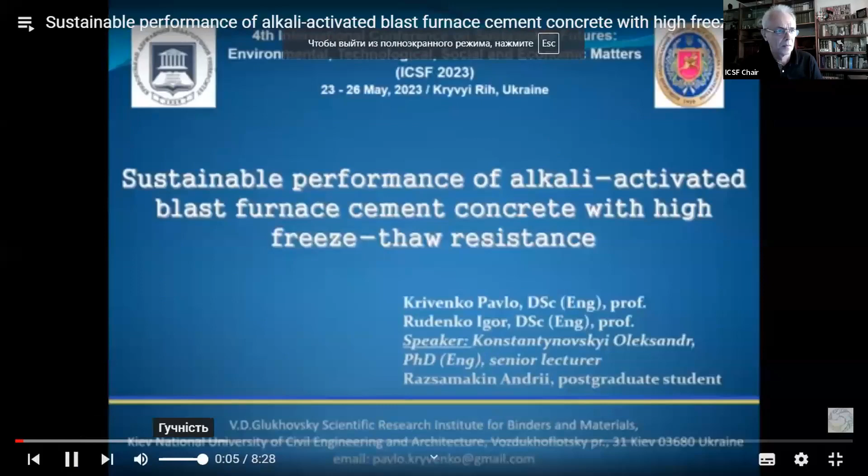Some technical problems. Sergei Alexeyevich, dear Sergei Ivanovich, could you please press the security button and enable screen sharing for any participants? I don't see a security button. It's your power for this, thank you. Possibly the first to enter and get administrative rights is Alexander Polivoda. Alexander, could you please check the security settings of our session? Alexander Polivoda is absent. Would you like to do this? I'm present, colleagues. Oh, okay, please. Nice to meet you, good morning. Good morning. Please start the presentation, Investigation of the Influence and others. First presentation, okay. Thank you. No, not this presentation, Investigation of the Influence of the Lime Content, first presentation. I even don't hear sound. Fast. Yes, this. Sound, please. We don't hear sound, Alexander Anatolyevich.

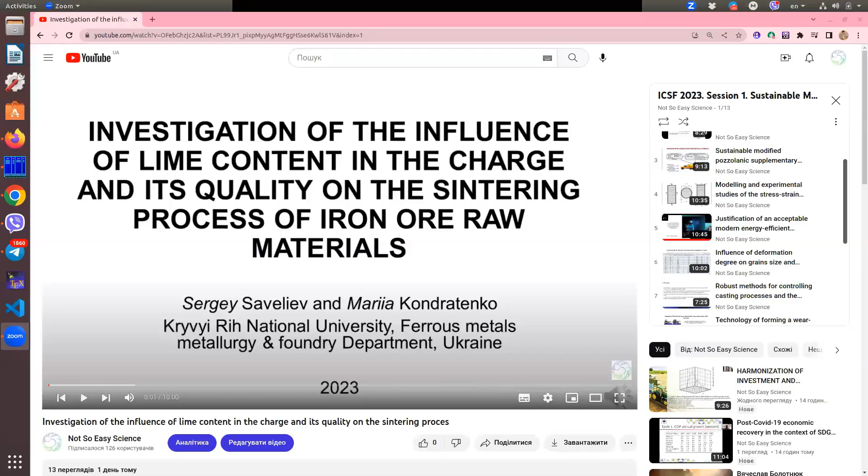Dear colleagues, your attention is invited to a research paper on the topic: Investigation of the Influence of Lime Content in the Charge and its Quality on the Sintering Process of Iron Ore Raw Materials. The work was carried out by scientific and pedagogical workers of the Department of Ferrous Metallurgy and Foundry Production of Kryvyi Rih National University.

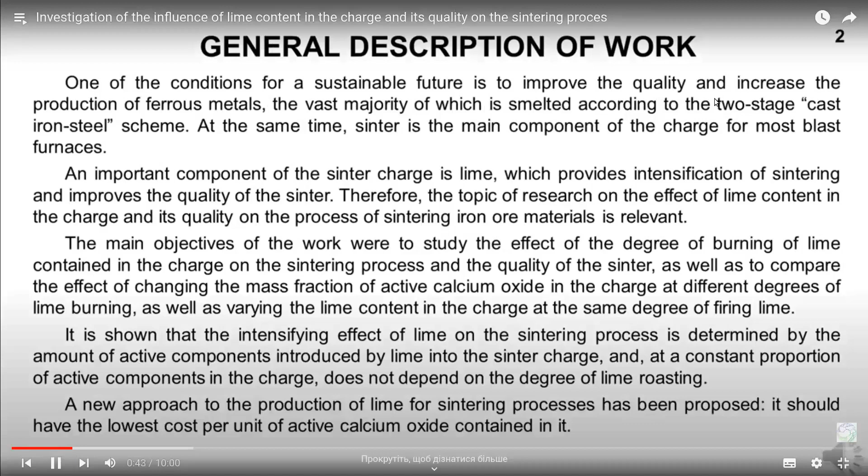General description of work: the main objectives were to study the effect of the degree of burning of lime contained in the charge on the sintering process and the quality of the sinter, as well as to compare the effect of changing the mass fraction of active calcium oxide in the charge on sintering performance, first with different degrees of lime roasting and the same lime content in the charge, and second with different lime content in the charge and the same degree of lime roasting. It is shown that the intensifying effect of lime on the sintering process is determined by the amount of active components introduced by lime into the sinter charge, and, at a constant proportion of active components in the charge, does not depend on the degree of lime roasting.

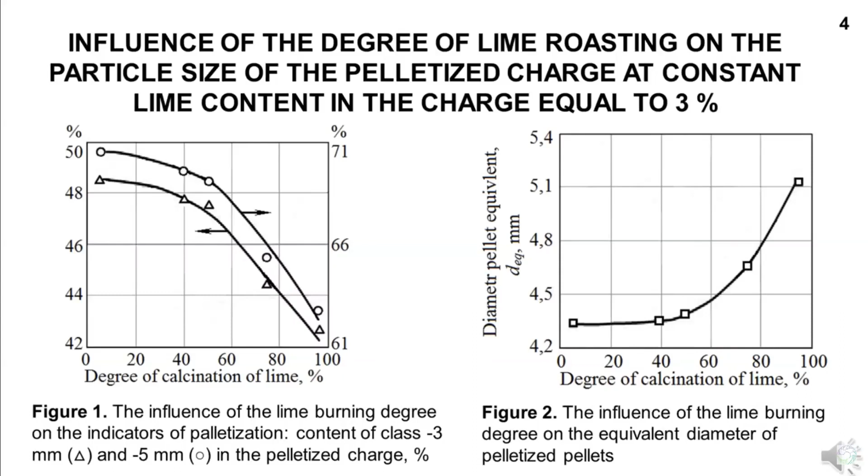It can be seen from the figure that with an increase in the degree of roasting of lime, the equivalent diameter of the pelletized charge granules increases.

Influence of the degree of roasting of lime, given in the charge, on the strength of the sinter. The dependence of test results of sinter in the drum on the lime burning degree is extreme, Figure 5, which is obviously caused by a change with the increase in the degree of calcination of lime in the ratio between the development of processes that have the opposite effect on the strength of the sinter.

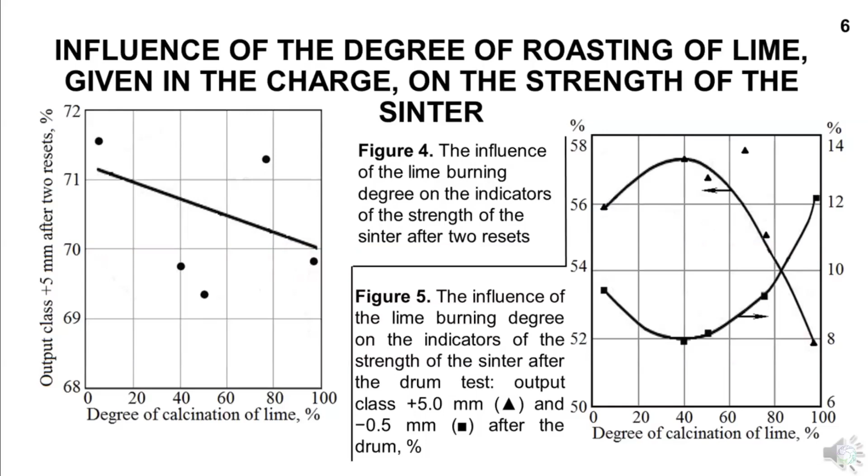The yield of the +5 mm class after double dumping of the sinter pie from a height of 2 meters, while increasing the lime burning degree, tends to decrease. Figure 4.

Influence of the content of active calcium oxide in lime on the intensity of the sintering process and the strength of the sinter at a constant lime content in the sinter charge, 3%.

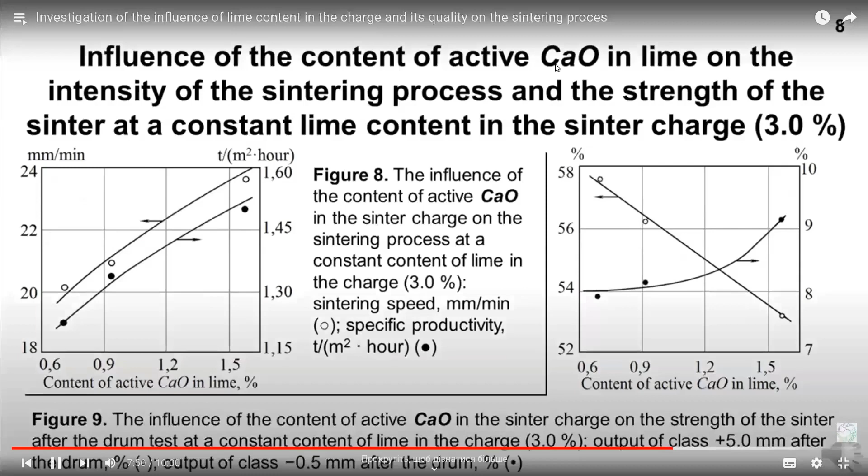With an increase in the active calcium oxide concentration in the sinter charge in the range of 0.71 to 1.58%, the sintering rate and specific productivity continuously increase, see Figure 8, as well as the drum test indicators decrease, see Figure 9.

The mechanism of the lime intensifying effect is associated with its positive impact on the process of charge pelletization, reduction of the proportion of small fractions of 5 to 0 and 3 to 0 millimeters in the pelletized charge, which is accompanied by an increase in the vertical sintering rate and specific productivity of the sinter plant.

The efficiency of the limestone replacement by lime at sintering is defined by the quantity of active calcium oxide introduced by lime in a sinter charge, and in this sense practically does not depend on the lime burning degree or its concentration in charge. A similar pattern occurs when using lime as a binder in the production of pellets.

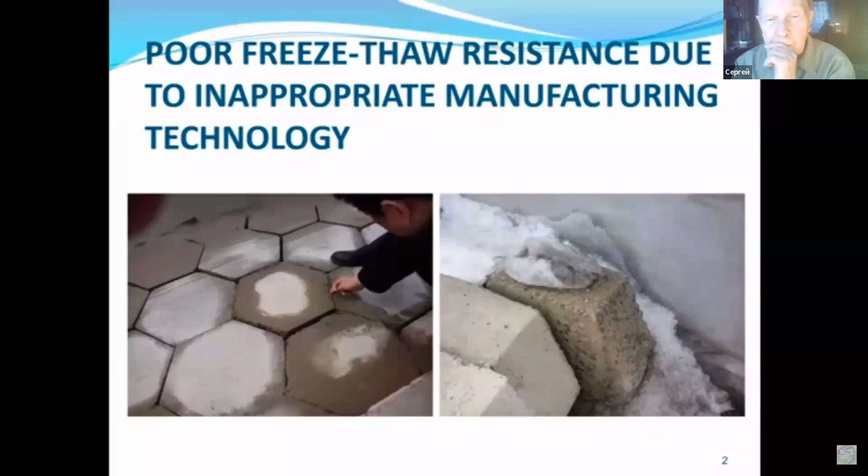To ensure the durability of constructions is one more current world tendency of sustainable development of mankind. The most important properties of concrete used for evaluation of durability depend on destination and environment. Resistance of concrete to freeze-thaw cycles is one of the criteria. Cements obtained due to alkali activation of blast furnace cements are the most prospective ones to ensure advanced service life of concrete structures of special purpose. The peculiarities of porous structure cause advanced freeze-thaw resistance of alkali activated blast furnace cement concrete.

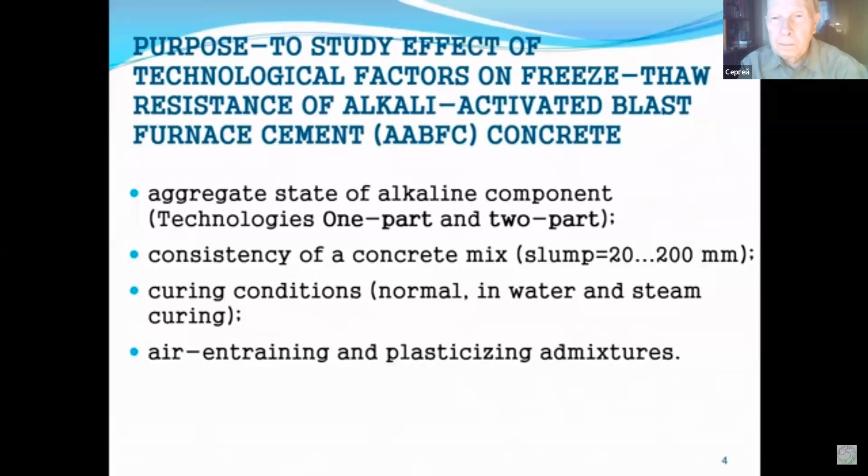Porous structure of such concrete in its turn is caused by technological factors such as consistency of fresh concrete, aggregate state of alkaline component, curing condition, and application of chemical admixtures. The modern requirements to consistency of fresh concretes are governed by practice. Production of alkali activated blast furnace cements, namely under all-in-one technology, causes the expediency of alkaline component exactly in dry form. Thus, the aim of this research was to investigate the effects of technological factors on porous structure of alkali activated blast furnace cement concrete of special purpose to provide its high freeze-thaw resistance as criterion of sustainable performance.

The main constituents of the blast furnace cement type CEM III/C were represented by ground granulated blast furnace slag and Portland cement type CEM I 42.5R. The blast furnace cement was composed of 95% of slag and 5% of Portland cement by mass. The alkaline component was introduced in a concrete mixer in dry form or in liquid form in such a way that its content in the concrete would be equivalent. A river silica sand and a granite gravel were used as aggregates. Alkali activated blast furnace cement concrete was modified by complex admixtures, presented by sodium lignosulfonate and a waterproofing agent based on ethyl hydrosiloxane polymer.

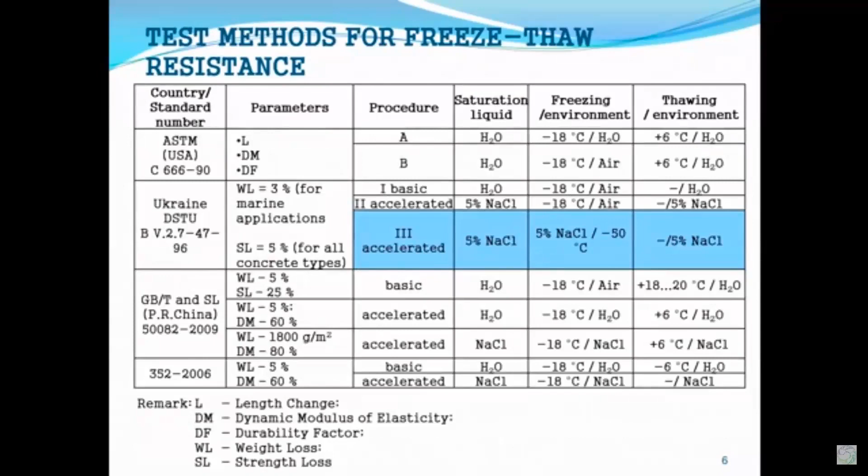Freeze-thaw resistance of alkali activated blast furnace cement concrete was studied according to the third accelerated test method prescribed by the national standard of Ukraine. According to this method, the concrete cubes were saturated with a 5% solution of sodium chloride at temperature 18 degrees, and after that were subjected to freezing at temperature minus 50 degrees. Thawing was done in a 5% solution of sodium chloride. A class of concrete in freeze-thaw resistance was designated as a number of alternate freezing and thawing cycles at which mean compressive strength decreased by no more than 5%. The freeze-thaw resistance was assessed by the correspondence between permissible number of cycles by the mentioned method and by the first basic method prescribed in the standard.

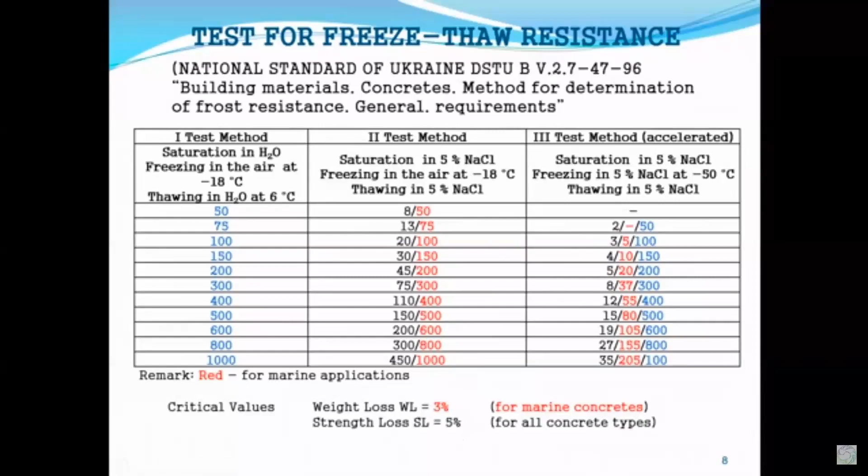Alkali activated blast furnace cement concrete was prepared by one-part technology, when alkaline component was introduced in dry form, and two-part technology, when it was introduced in liquid form. The specimens hardened in water, under normal conditions and under steam curing. It was revealed that consistency of fresh concrete is an important factor of porous structure. Increasing of consistency from class S1 up to class S4, with alkaline component in dry as well as in liquid form, ensured increasing volume of open pores and decreasing volume of conditionally closed pores. Less volume of conditionally closed pores determines formation of less dense and more permeable structure, which causes deterioration of physical and mechanical properties, including freeze-thaw resistance decrease.

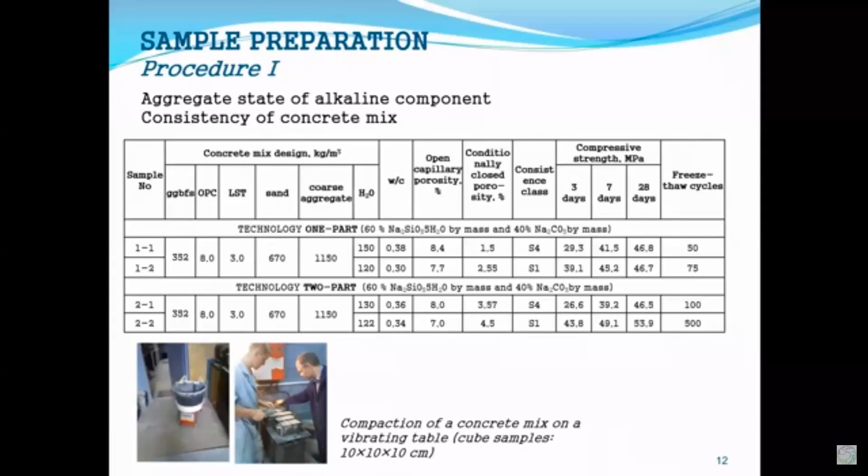Application of alkaline component in dry form, in contrast to liquid form, ensured high volume of open capillary pores at consistency classes S1 and S4 accordingly; lack in filling intensity of porous space by hydrosilicate gel caused this phenomenon. Decrease in volume of conditionally closed pores occurred. Specified changes in porous structure ensured a decreasing tendency in freeze-thaw resistance. Normal curing conditions were more advisable compared with curing in water or under steam curing in view of formation of effective porous structure.

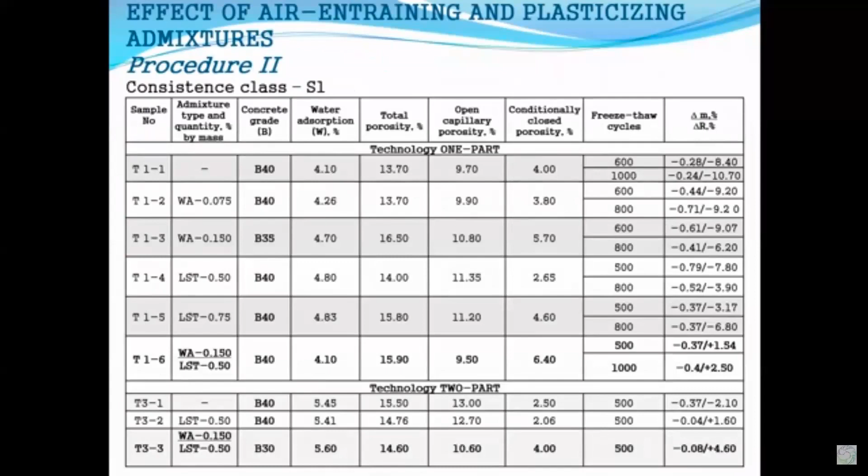Porous structure of alkali activated blast furnace cement concrete at consistency of class S4 after hardening during 28 days under normal conditions was characterized by decreased volume of open capillary pores as well as increased volume of conditionally closed pores compared with analogs under water or steam curing. These changes contributed to a more dense structure, providing advanced freeze-thaw resistance. Application of air entraining and plasticizing admixtures ensured higher volume of conditionally closed pores and lesser volume of open capillary pores, which increases freeze-thaw resistance when alkaline component was applied in dry as well as in liquid form.

The ways to ensure high freeze-thaw resistance of concrete of special purpose were pointed out: limitation of consistency of fresh concrete, application of the alkaline component in liquid form in contrast to dry form, application of air-entraining and plasticizing admixtures, and hardening under appropriate temperature-humidity conditions ensure closed porosity between 3 and 6% and advanced freeze-thaw resistance.

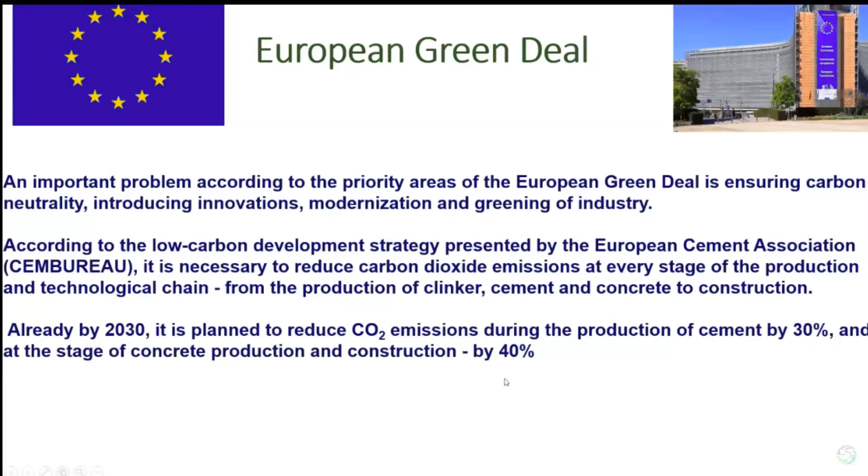The investigation task of the article is to create eco-efficient blends containing supplementary materials, to design criteria of hydraulic surface activity of supplementary cementitious materials, and to show technological, technical, economical, and ecological benefits from using supplementary cementitious materials in low carbon concrete.

The problem of energy efficiency and reducing CO2 emission in building production is largely determined by a set of technological and ecological ways to replace a part of Portland cement clinker with supplementary cementitious materials. Due to the rational selection of cementitious materials in the production of low-carbon cement, technical, ecological, and economic effects are achieved. Pozzolanic supplementary materials such as natural zeolite, fly ash, and microsilica were used.

Adding supplementary cementitious material of pozzolanic action directly to the concrete mix instead of part of the Portland cement contributes to reducing the cost of concrete, increasing the strength in the subsequent period of hardening and increasing durability. In this case, replacing each kilogram of clinker in concrete with additional cementitious materials allows reducing CO2 emission by 0.61 kilogram.

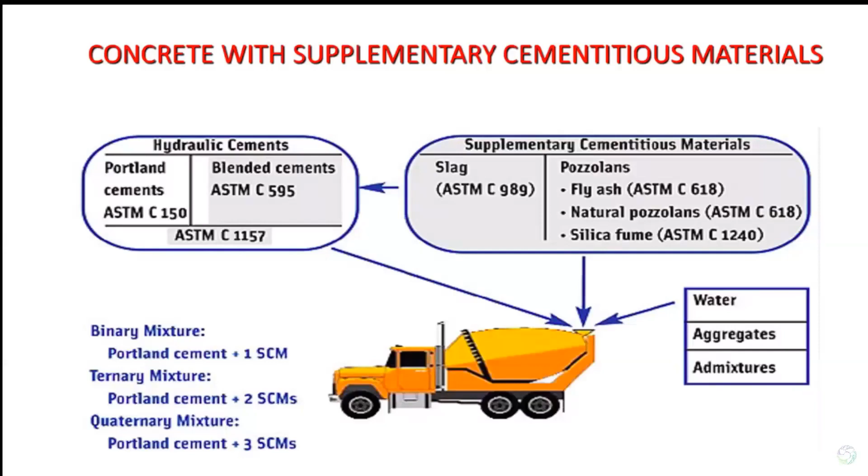Fly ash is an important pozzolanic material; when mixed with cement it significantly affects the strength development of cementitious composites. Fly ash increases durability and strength of concrete at later age, but at the same time reduces the early strength of concrete. It also reduces the amount of water-reducing admixture required to obtain the same consistency.

Silica fume significantly increases the strength and durability of concrete, but it has a high water demand, so it requires the use of an increased amount of water-reducing admixture. A significant resource of the European region of natural pozzolans is zeolite tuffs.

This makes it possible to solve the problem of regional application of pozzolanic supplementary cementitious material. Highly siliceous zeolite tuff, the main mineral of which is clinoptilolite, has unique characteristics such as high specific surface area and ability to exchange cations.

Natural zeolite with 70% content provided from Sokyrnytsky quarry was used. Superfine zeolite was obtained by grinding natural zeolite to specific surface area greater than 11,000 square centimeters per gram. Interaction of superpozzolana with products of hydration of Portland clinker leads to decrease of its porosity, which helps to increase the strength, corrosion resistance, and determine its durability.

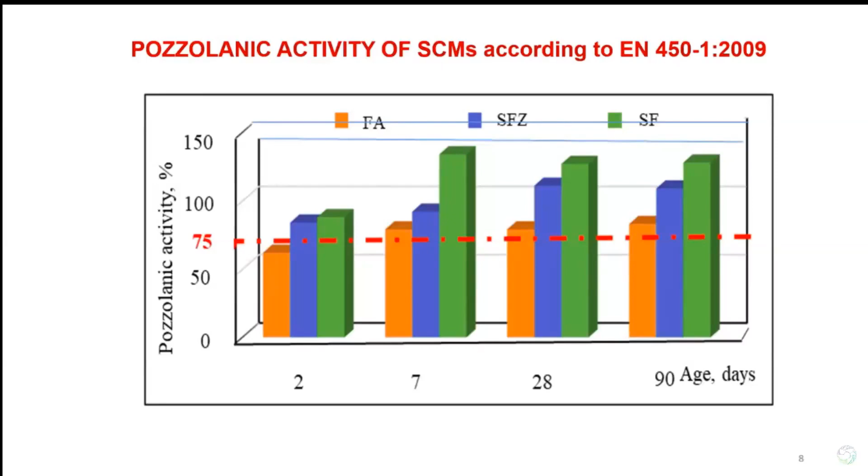Highly dispersed supplementary cementitious materials such as superfine zeolite and microsilica are characterized by increased water demand and have low bleeding. Fly ash is of lower dispersion compared to the other pozzolanic materials. Fly ash is characterized by particles of the correct spherical shape, which provide a plasticizing effect due to the roller-bearing effect. Therefore, its water demand is reduced 27%, but it's characterized by significant bleeding.

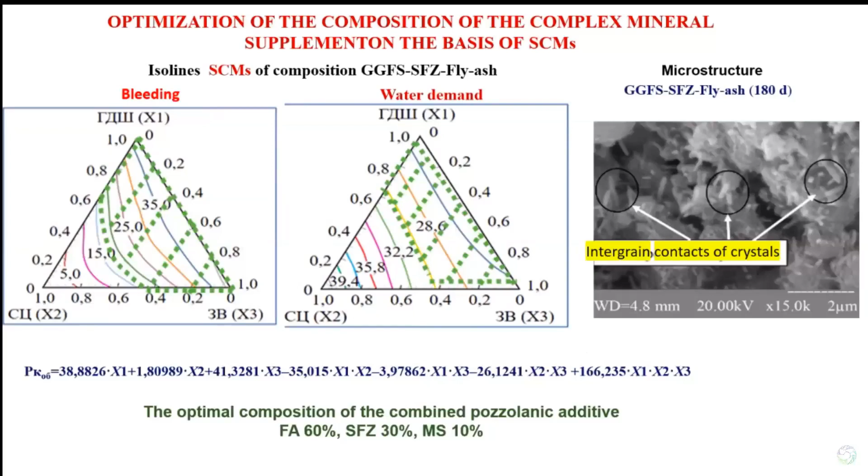The optimal composition of complex pozzolanic material blends is determined by strength activity index. The combined effect of components on the pozzolanic activity after 28 and 90 days was investigated using the Scheffé simplex-lattice plan method. For the component mixture, each point of the triangular diagram corresponds to one ratio. The regression equation is presented as follows. The optimal composition of the combined pozzolanic additive is fly ash 60%, superfine zeolite 30%, and microsilica 10%.

The water reducing effect for the lignosulfonate modifier is 14%, and when modified with polycarboxylate, water reducing effect is 22%. At the same time, the blend modified with polycarboxylate is characterized by higher compressive strength: more than 20 megapascals after 2 days and more than 50 megapascals after 28 days.

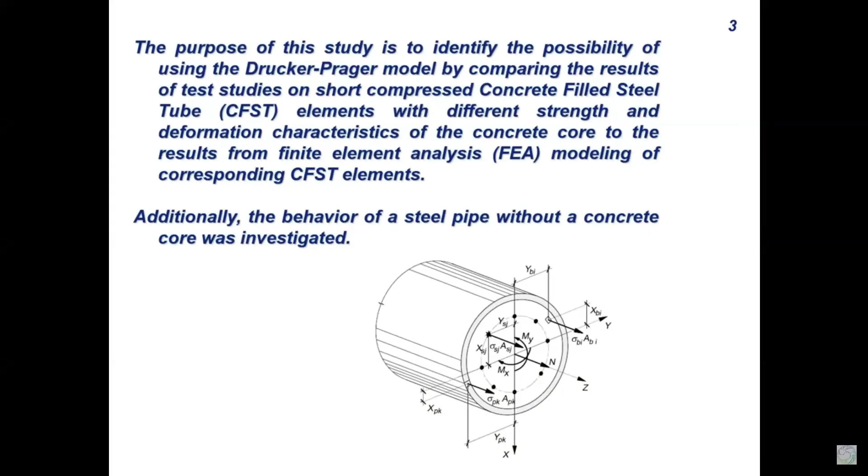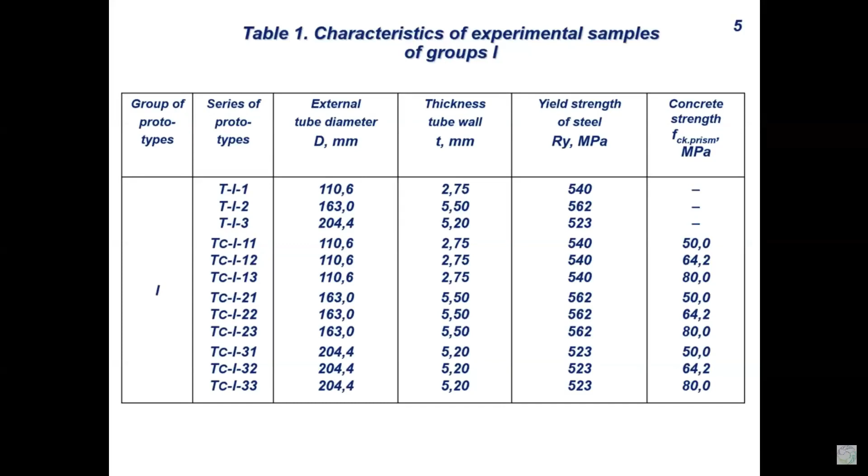The above-mentioned material is based on the experimental studies conducted by the authors earlier. According to the results of these experiments, it was possible to establish the nature of the destruction of the tube-confined concrete with strengthened cores of different structural forms, and the distribution of deformations at all stages of loading. The next slide shows the characteristics of the same samples. In particular, the diameters of pipes and the thickness of their walls, the yield strength of steel, the strength of concrete.

Modeling method adopted in the work. The modeling of the operation of CFST elements was carried out considering the nonlinear function of the components. The calculation was carried out considering large deformations. By the task, the CFST elements have a symmetrical tubular section and a central load case.

To reduce the size of the model and reduce computational costs, the analysis was carried out considering the modeling of cyclic symmetry. In this case, the behavior of one symmetrical sector, 1/4 of the tubular component, was calculated, and the results obtained were used to build the response behavior of the full component, as a post-processing step.

The simulation was carried out using the non-commercial software ANSYS Student by the finite element method in the Workbench environment. The nonlinear calculation of CFST elements was carried out considering the Drucker-Prager concrete work model, and taking into account the multilinear isotropic hardening of steel. The joint work of the steel pipe and the concrete core in the model was provided by frictional contact. Following studies, the friction coefficient was taken equal to 0.5 in the simulation.

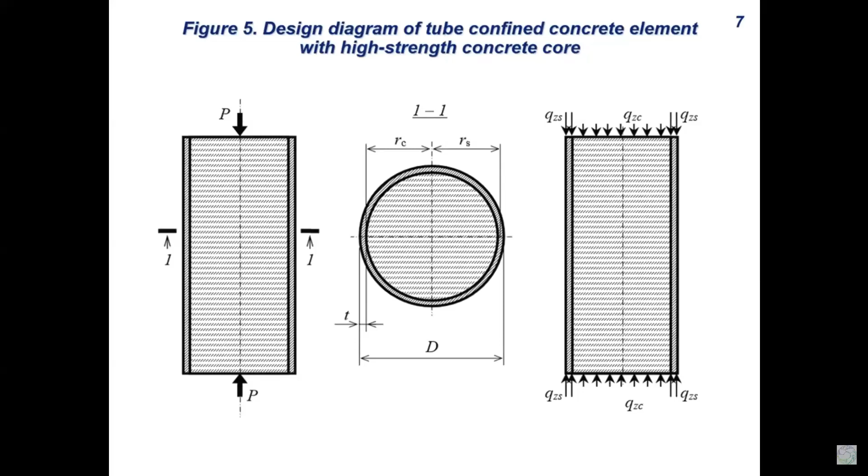Features of concrete modeling. The Drucker-Prager model was used to simulate the behavior of concrete, which describes the nonlinear behavior of concrete and is based on the theory of plastic flows. The calculation of the parameters of the Drucker-Prager model was carried out according to the methods proposed in the famous works. The parameters given in Table 2 were used in the calculations of the behavior of concrete.

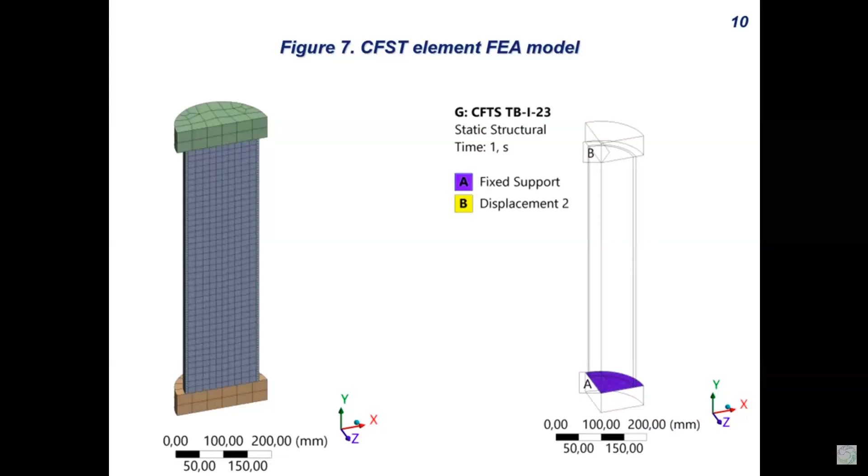CFST FEA model. When preparing the mathematical model, parametric design was applied, which allows changing the model when its geometry changes. CAD models were created in SpaceClaim. Models were transferred to ANSYS Workbench via a direct interface. The contact between the concrete core and the steel pipe was assumed in the calculations as frictional, with a friction coefficient of 0.5. The connection between the base plates and the pipe was set as bonded, and between the base plates and the concrete core was frictionless.

All elements were modeled using SOLID186 hex elements. The SOLID186 element is defined by 20 nodes having 3 degrees of freedom per node. The element supports plasticity, hyperelasticity, creep, large deflections, and large strains. The size of the concrete element was taken equal to 15.2 mm, for the pipe, 5.5 mm. The size of the elements of the base plates was assumed to be 32 mm, Figure 7.

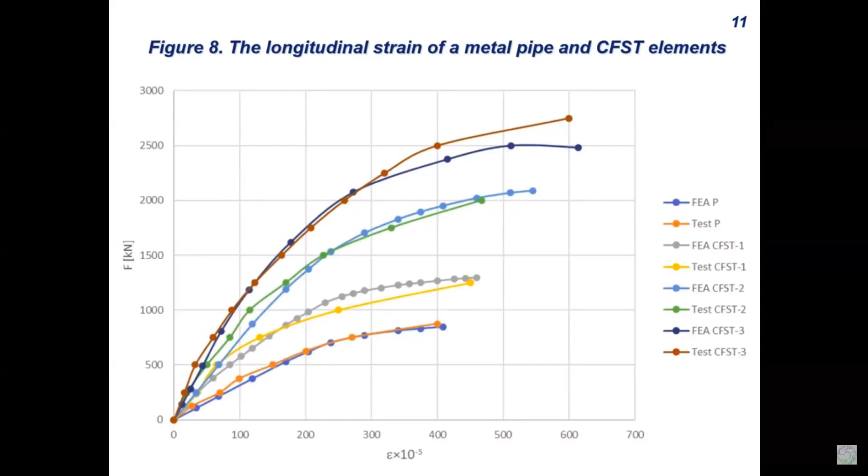Results comparison of simulation and natural experiments. The dependence of deformations of CFST elements on the load was obtained from test and FEA studies. The results are shown in Figure 8 and Figure 9. A comparison of the two groups of results shows that the simulation method used in the work is sufficiently accurate to study the behavior of short CFST. Particularly good correlation is obtained in the region of CFST linear deformations. This allows us to conclude that the proposed method can be used to predict the strength characteristics of CFST elements.

The modeling technique utilized in this study enables consideration of the redistribution of stresses within both the concrete core and pipe dynamically. Within the region of linear deformations, the stresses at the center of the concrete core and pipe did not differ. However, upon transitioning to the zone of nonlinear deformations, the stresses in the longitudinal axis of the concrete core were found to be higher than those in the contact zone with the pipe.

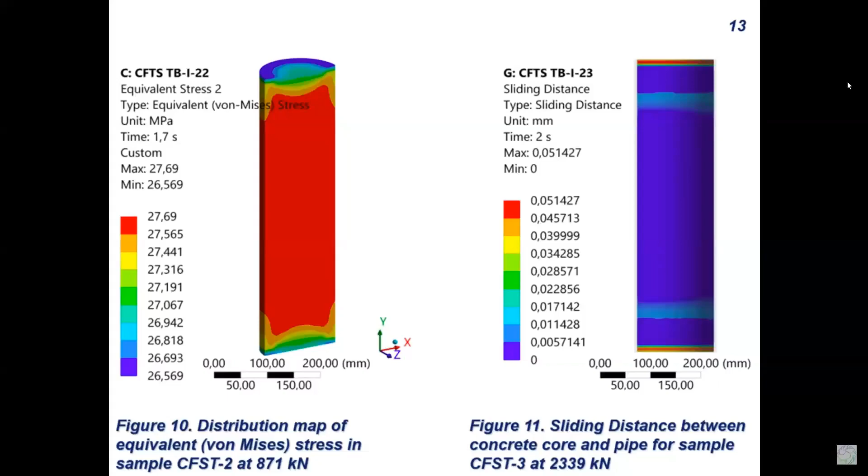The high degree of convergence between the modeling and test study results demonstrates the possibility of using the Drucker-Prager model to simulate the behavior of compressed CFST elements with different strength and deformation characteristics of the concrete core. Additionally, applying the FEM method allows for a deeper study of the interaction mechanism between the concrete core and the metal pipe.

The proposed method made it possible to look inside CFST elements and obtain data that is difficult to obtain through laboratory tests. The characteristics of stress distribution within the concrete core during both linear and nonlinear deformations of CFST elements, as well as the characteristics of the interaction between the concrete and pipe in the contact zone, have been revealed.

My name is Dinara Baskanbayeva from Kazakhstan. I give you a presentation on the topic: justification of an acceptable modern energy efficient method of obtaining sodium silicate for production in Kazakhstan. The article discusses the methods of production of sodium silicate and substantiates the possibility of organizing production in the Republic of Kazakhstan, as we have studied all the available experience in the production of sodium silicate, both now and in the past.

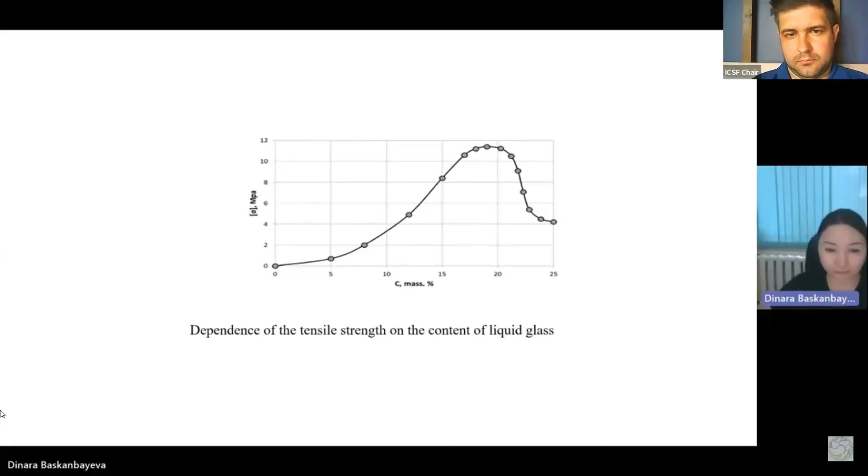The high cost of glass melting furnaces of the bath type, which are used in glass factories with a capacity of 14 to 16 tons per day, is estimated at...

Boundary conditions. Sodium silicate is a key source of reactive silicate, which is in high demand in many industries, including detergents, rubber, beverage, and paper and pulp.

The global sodium silicate market was valued at $6.3 billion in 2018, growing at a CAGR of 3.2% for the period 2020 to 2026.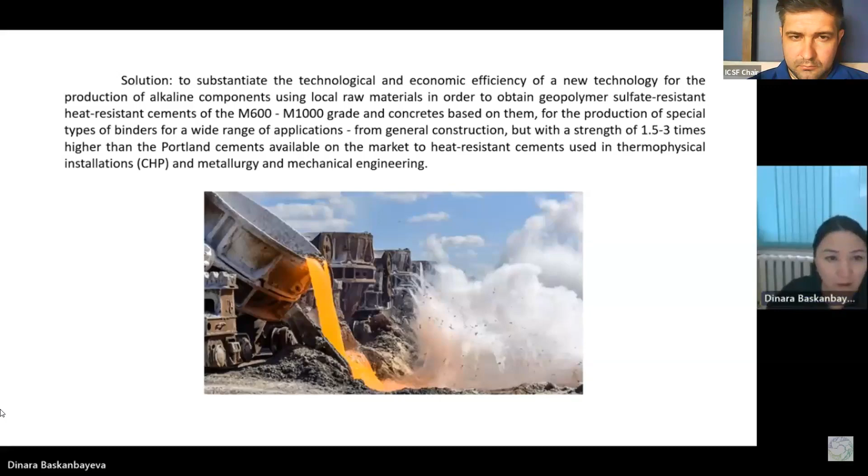In the study, traditional smelting methods were examined: carbonate methods, weld methods, sodium chloride, sublimation methods, sulfate methods, cullet smelting. The optimal variant has been chosen.

It is possible to reduce the cost of electricity by several times when introducing a highly efficient, innovative technology of electric melting into practice.

Our research team has developed a patent for the design of the furnace, which uses energy-saving technology. Familiarization and study.

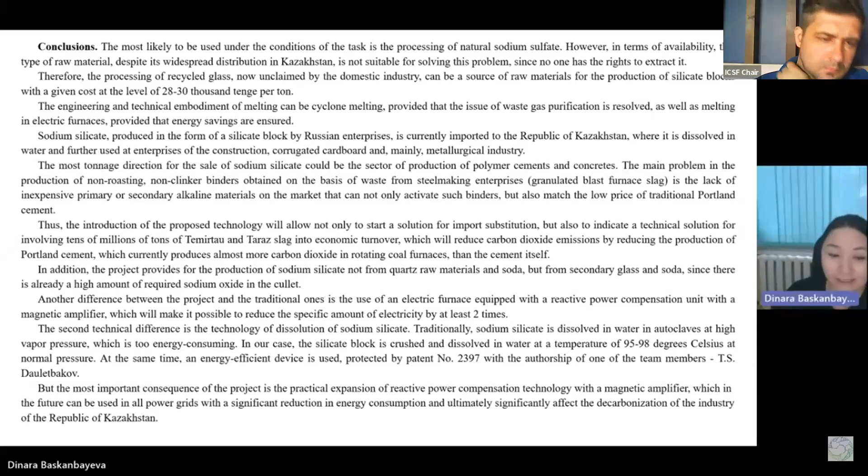In conclusion, the most likely approach under the conditions of the task is the processing of natural sodium sulfate. However, despite its widespread distribution in Kazakhstan, this type of material is not suitable for solving this problem, since no one has the right to extract it.

Therefore, the processing of recycled glass for the production of silicate blocks, with a given cost at the level of 28 to 30,000 tenge per ton. The engineering and technical embodiment of melting can be cyclone melting.

The issue of waste gas purification is resolved, as well as melting in an electric furnace, provided that energy savings are ensured.

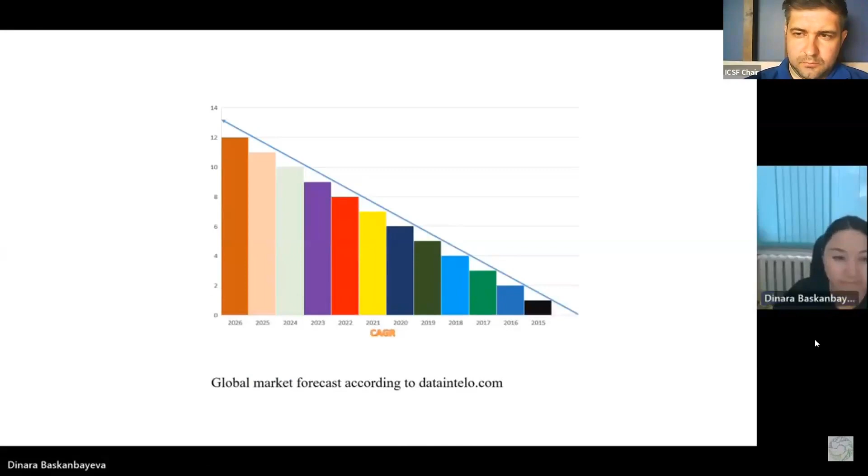Thank you for your report, Dinara. And I have several questions, maybe one question.

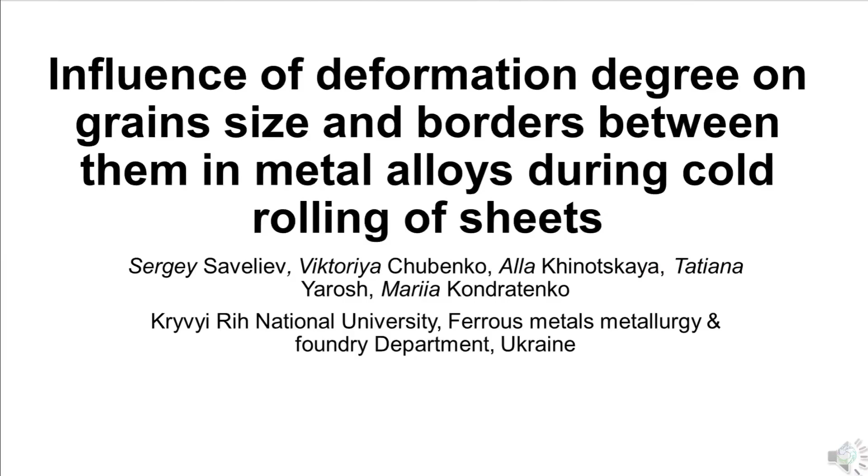Ability to plastic deformation of metals and alloys is determined by the yield strength of the material, which also depends on its internal structure. We therefore investigated regularities of the influence of the amount of reduction during cold rolling on grain size and grain boundaries. This will allow adjusting the strength and ductility of products by controlling the value of compression during cold rolling of steel.

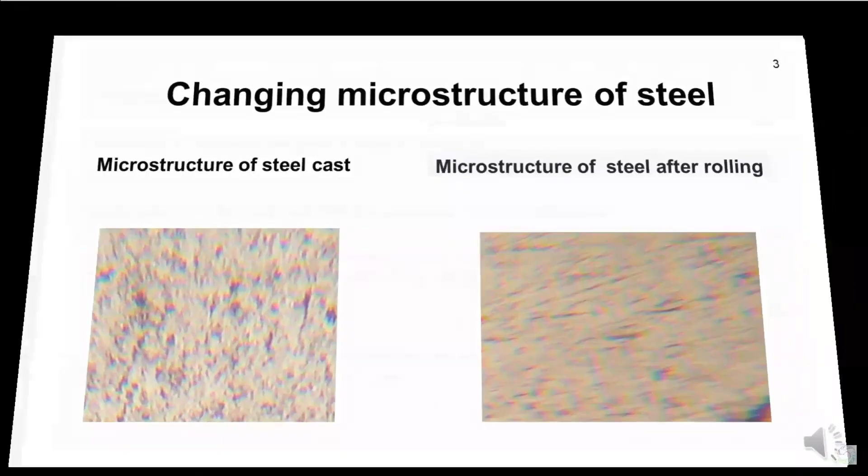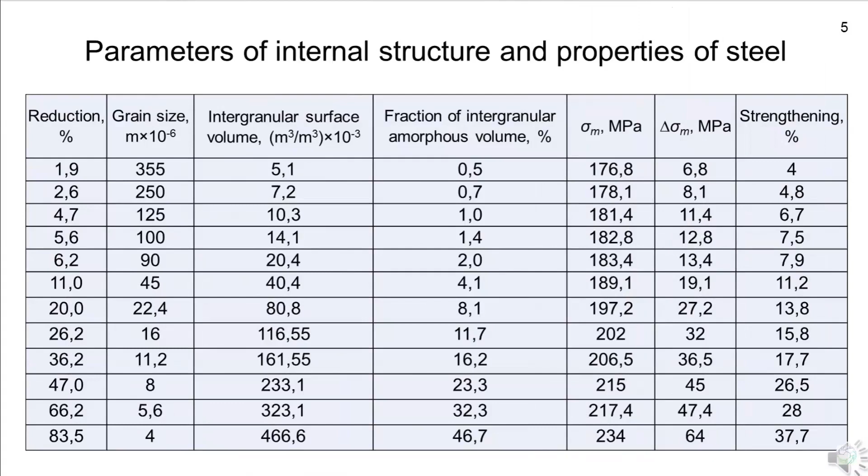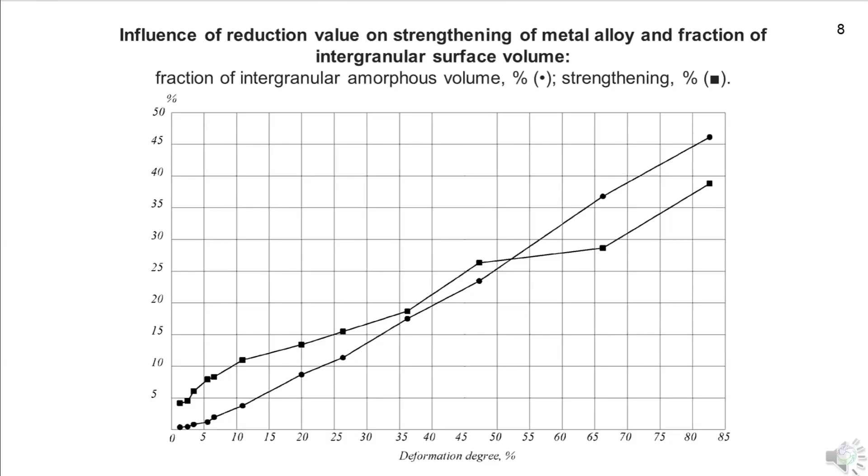The effect of the magnitude of compression, percent, on the hardening of the metal alloy and the proportion of intergranular volume, is shown in the graph on slide 8, which shows that these values increase almost equally with increasing deformation degree. The results suggest that there is a correlation between the increase in yield strength of the metal alloy and the size of the intergrain boundaries, that is amorphous layer, which contributes to the strength of the metal.

Conclusions. The changes which occur in the internal structure of metal products during forming have been analyzed, making it possible to establish dependence between the grain size of the metal alloy and the boundaries between them and the value of compression during cold rolling. The regularities of the effect of the magnitude of compression on the size of metal alloy grains, the boundaries between them and the hardening of the metal are established.

It is shown that the grain size decreases with increasing degree of deformation by hyperbolic function of order n, and the proportion of intergranular amorphous volume and hardening of the metal increases by linear functions, which allows to control the strength of steel products by controlling the size of grains and their intergranular surface. That is by changing the value of compression. End of speech.

Thank you very much, Sergey Gennadievich, for your presentation. And I have one question, just one question. Are the results applicable to hot rolling condition?

The work is robust methods for controlling casting processes and the quality of castings. Introduction and major challenges. Among the processes that affect the quality of machine parts, an important place is taken by the processes related to the production of good quality castings, which determine their physical and mechanical and performance properties. Robust methods based on the identification of objects under uncertainty, adaptive control methods, stabilization methods for automatic control systems, mathematical description of the system can be used for the purpose.

Improving the quality and competitiveness of industrial products is inevitably associated with additional cost and an increase in cost. To determine a rational solution to the problem of improving the quality of castings, it's necessary to develop a conceptual and mathematical model of the quality formation process, taking into account all the costs, risks, and losses in the designer, manufacturer, and consumer of products.

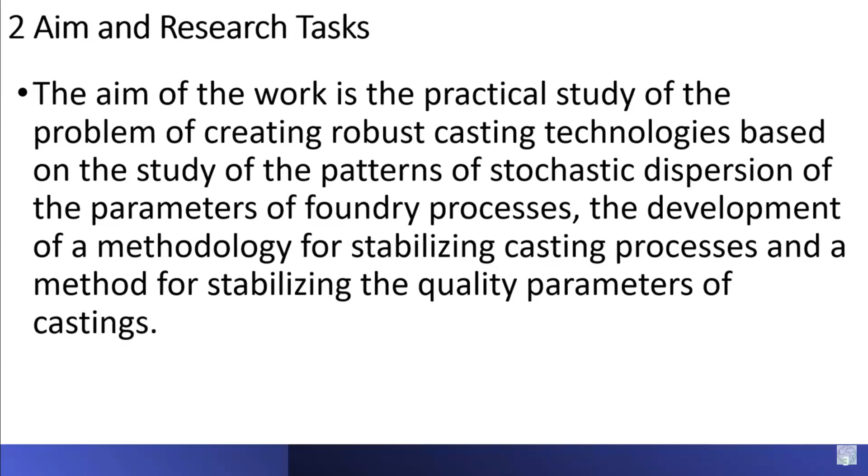Aim and research tasks. The aim of the work is a practical study of the problem of creating robust casting technologies based on the study of the patterns of stochastic dispersion of the parameters of foundry processes, the development of a methodology for stabilizing casting processes, and a method for stabilizing the quality parameters of castings.

Research methodology. The main task in managing the reliability of a cast part is to determine the distribution function of the bearing capacity of the casting. Therefore, the initial step in solving the reliability control problem is to determine the general form of the law of dispersion of the bearing capacity. It's advisable to use the system of Johnson distribution functions to describe the stochastic dispersion of the parameters of foundry processes.

Method for stabilizing. To build mathematical models of the formation of the process properties of the mixture, the regression models were used, and their parameters were determined based on the experimental data. Based on the results of the conducted research, a method for stabilizing the process of the preparation of a molding mixture was developed. Implementing the method for stabilizing the process properties of molding mixtures made it possible to improve the quality of castings and reduce rejects with the gas-induced defects.

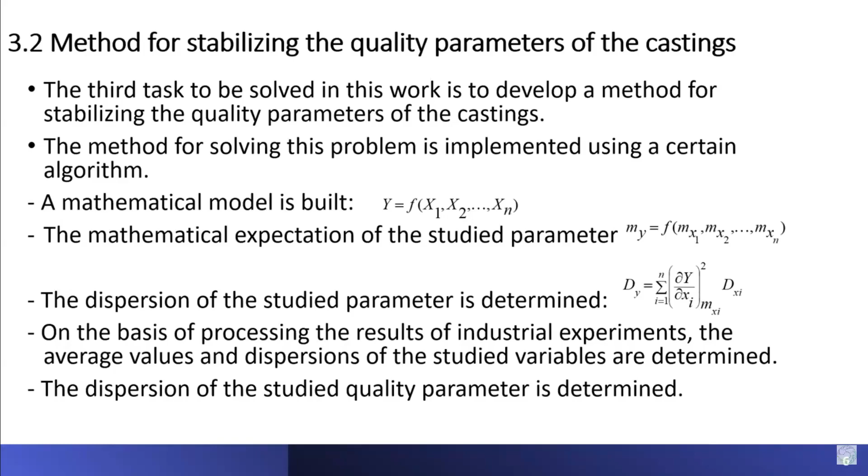The dispersion of the studied parameter is determined. Also, you can see this formula on the slide. On the basis of processing the results of industrial experiments, the average values and dispersions of the studied variables are determined. The dispersion of the studied quality parameter is determined.

Method of issuing data sheets for castings. A specific feature of solving the problem of improving the stability of the process and diagnosing the casting defects is the requirement for increased reliability and accuracy of the production information used. For this purpose, a method of issuing data sheets for castings was developed, based on which industrial experiments were conducted in foundries.

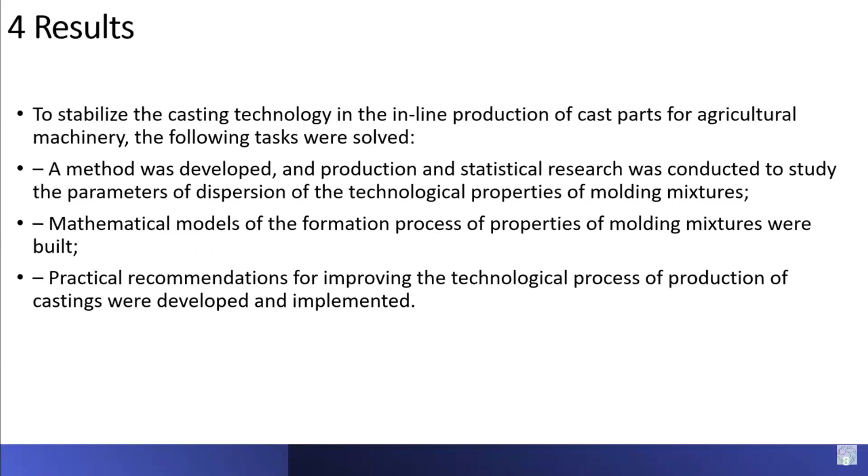Results. To stabilize the casting technology in the inline production of cast parts for agriculture machinery, the following tasks were solved. A method was developed, and production and statistical research was conducted to study the parameters of dispersion of the technological properties of molding mixtures. Mathematical models on the formation process of properties of molding mixtures were built. Practical recommendations for improving the technological process of production of castings were developed and implemented.

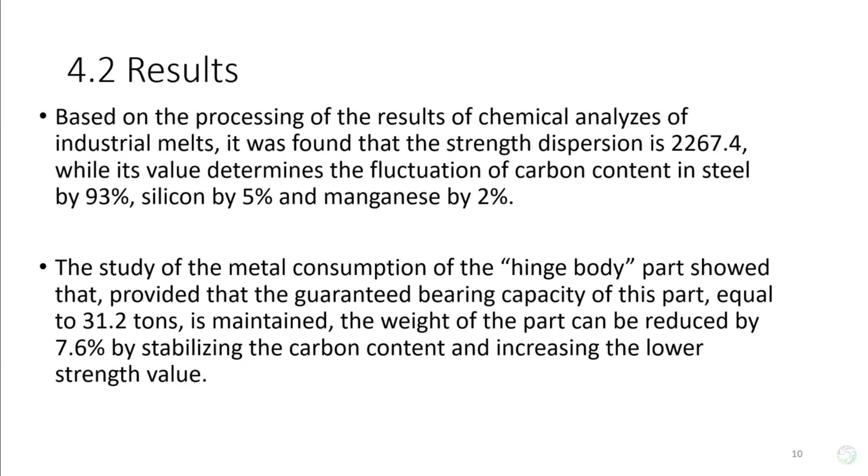Based on the processing of the results of chemical analysis of industrial melts, it was found that the strength dispersion is 2267.4, while its value is determined by the fluctuation of carbon content in steel by 93%, silicon by 5%, and manganese by 2%. The study of the metal consumption of the hinge body showed that, provided that the guaranteed bearing capacity of this part equal to 31.2 tons is maintained, the weight of the part can be reduced by 7.6% by stabilizing the carbon content and increasing the lower strength value.

Conclusions. In the production of good quality parts, an important role is taken by the processes related to the production of castings, which determine their physical, mechanical and performance properties. Robust methods based on the identification of objects under uncertainty, adaptive control methods, stabilization methods for automatic control systems, and mathematical description of the studied process are promising to manage the quality of castings.

The analysis of the situation has shown that the existing pattern of technological research established in the field of casting technology should be supplemented by a fundamentally new stage related to the development of an apparatus, methods, and working algorithms to address the issue of stabilizing the parameters of the casting process and the quality of castings.

Based on the production and statistical research, the regular patterns of the dispersion of the casting process parameters and the quality of castings were studied. It has been shown that the Johnson SB distribution is the most appropriate in terms of the meaningfulness and accuracy of describing the variation in the characteristics of technological processes and parameters of castings and cast parts. The obtained results can be used to improve the efficiency of problem solving in the casting quality management system.

A method for stabilizing the casting quality parameters was developed. It has been shown that it's more efficient to stabilize the strength and improve the dimensional accuracy of castings simultaneously. With the existing casting production process, the dimensional accuracy of castings corresponds to grade 11. With the increase of the dimensional accuracy grade, the metal content of the casting can be reduced by 16.3% after reaching grade 10, by 20.4% after reaching grade 9, and by 24.2% after reaching grade 8.

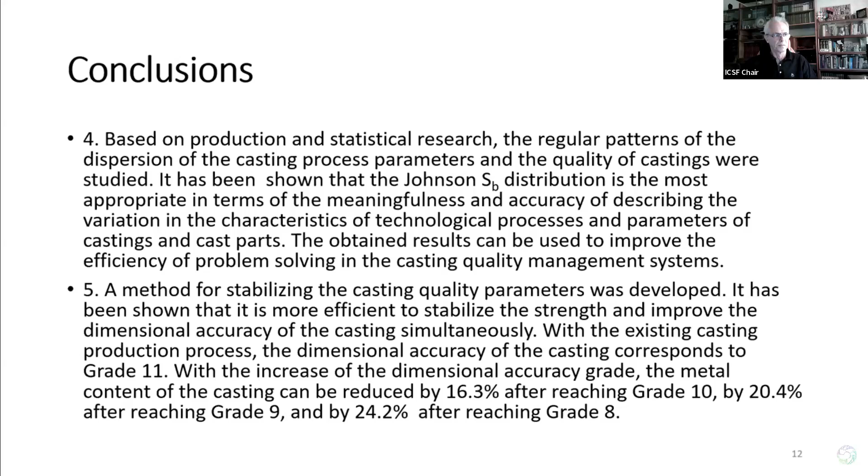Thank you very much for your interesting presentation. And I have several questions, in Ukrainian.

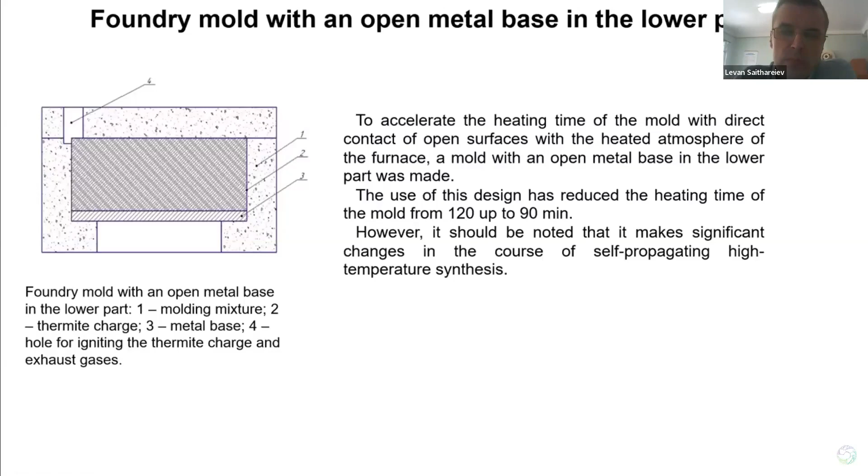The use of this design has reduced the heating time of the mold from 120 to 90 minutes. However, it should be noted that it makes significant changes in the course of self-propagating high-temperature synthesis. After initiating the combustion of the thermite charge, for 0.5 minutes from the beginning of the process there is a sharp decrease in the temperature of the lower surface of the metal base.

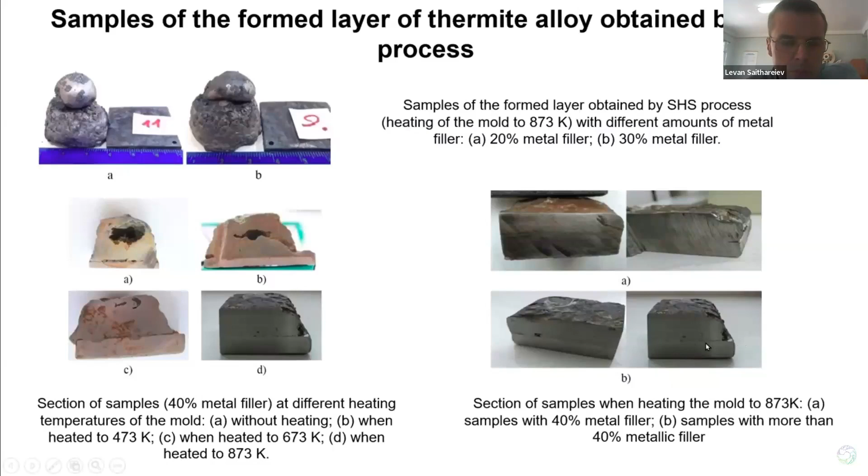In metallographic studies of the formation zone of the thermite alloy layer with a metal base, at a heating temperature of the mold below 473 kelvins, there was a loose connection of layers with the base. There were slag inclusions, and in the upper part there were shrinkage shells.

For samples obtained by heating the mold to 873 kelvins, the liquid state of the thermite alloy was longer. The time to crystallization was 16 seconds. The surface of the metal base melted. And the slag, consisting of corundum, emerged from the zone of functional layer formation.

Thus, the zone of formation of the functional layer is characterized by stability of the macrostructure and the positive effect of corundum, which creates an inoculating modification effect for the thermite alloy. This, in turn, contributes to the formation of chromium carbides.

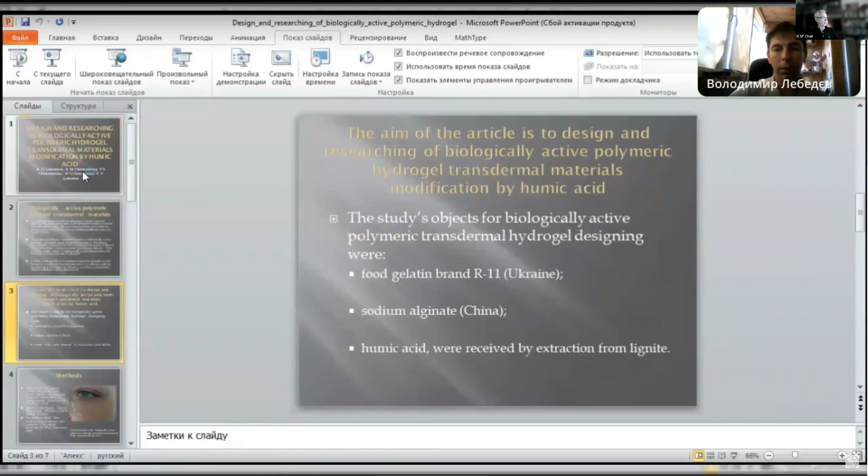We used several methods to research our biologically active polymeric hydrogel, including complementary studies combined with various techniques. We used microscope studies of the hydrogel using electron microscope, digital microscope, and a color sensor used in China.

For determination of moisture and lipid skin balance, the professional skin moisture and oil analyzer SK92, produced in China, was used. The moisture and lipid balance was measured in the area around the eyes before and after applying the biologically active polymeric hydrogel transdermal material for 15 minutes.

The test subject was a 26 year old woman. The skin moisture and fatness range is from 1 to 99.9%.

In the first stage, the biologically active polymeric hydrogel transdermal materials based on gelatin and sodium alginate had conditional viscosity and conductivity dependent on different humic acid content; the results are shown in slide 5.

Next, we carried out a study to determine the effect of humic acid modification on the most important operational properties shown in slide 5 of the biologically active polymeric hydrogel transdermal materials: swelling degree, and the effect on moisture and lipid balance measured for skin.

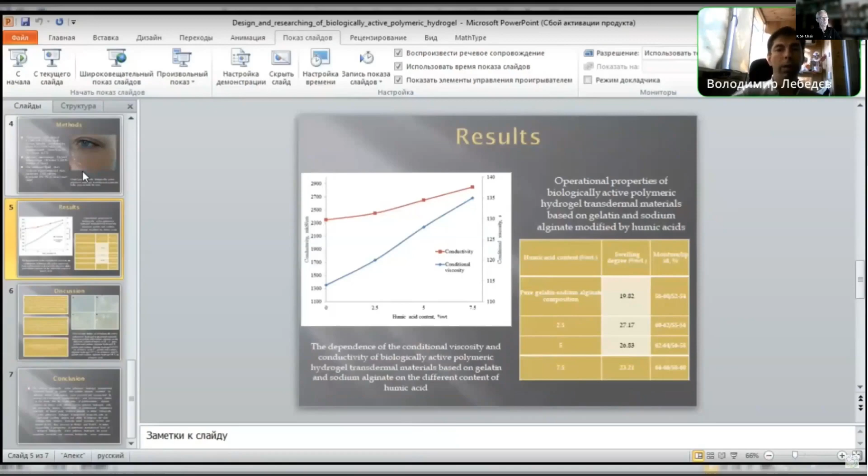So we can make the following conclusion from our research: the effective biologically active polymeric hydrogel transdermal material based on gelatin and sodium alginate modified by different humic acid content was obtained.

Modification by humic acid makes it possible to obtain polymeric hydrogel transdermal material with increased swelling degree and the ability to improve the skin's moisture and lipid balance.

In future research, it is promising to determine the transdermal level of the designed biologically active polymer hydrogel for important medicines and cosmetic biologically active substances. Thanks for the possibility to make my presentation. I am ready to answer any questions.

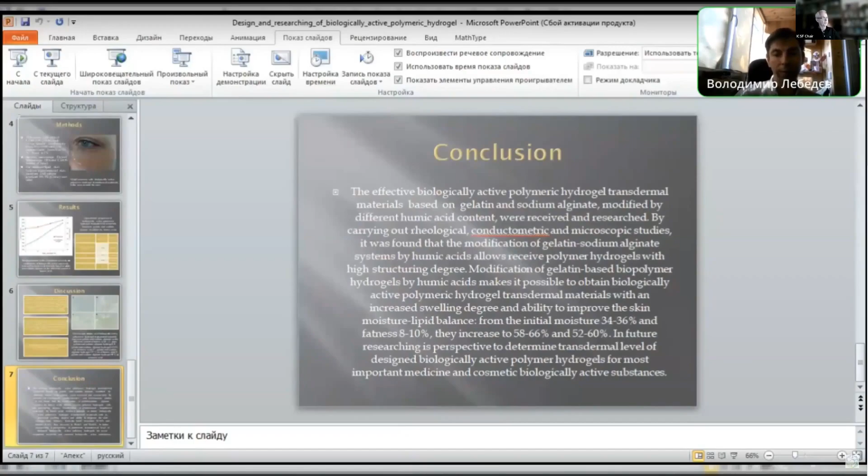One minute, I have one question. What are the main characteristic requirements of the transdermal materials you developed?

Most of all, the most important characteristics are the degree of swelling of our materials, its high shape stability, and most importantly, its ability to influence the characteristics of human skin. In our case, this is the regulation of water and lipid balance of human skin.

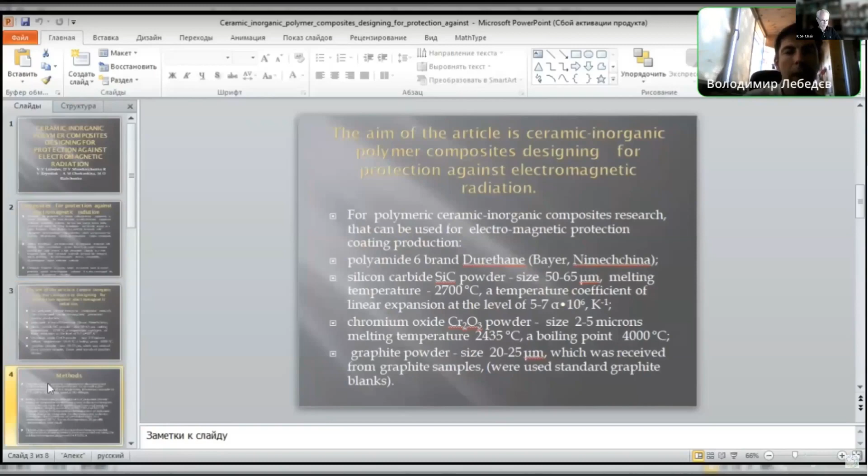Polymeric ceramic-inorganic composites for electromagnetic radiation protection were produced by extruding the raw materials in a single screw laboratory extruder, at temperatures of 117 to 200, and screw speed of 13 to 100 rotations per minute.

Strength characteristic determination of the composites for electromagnetic radiation absorption was carried out for level of impact toughness and breaking stress during bending. Optimization experimental statistical mathematical models, in regression equation form, were constructed using the computer program Statistica.

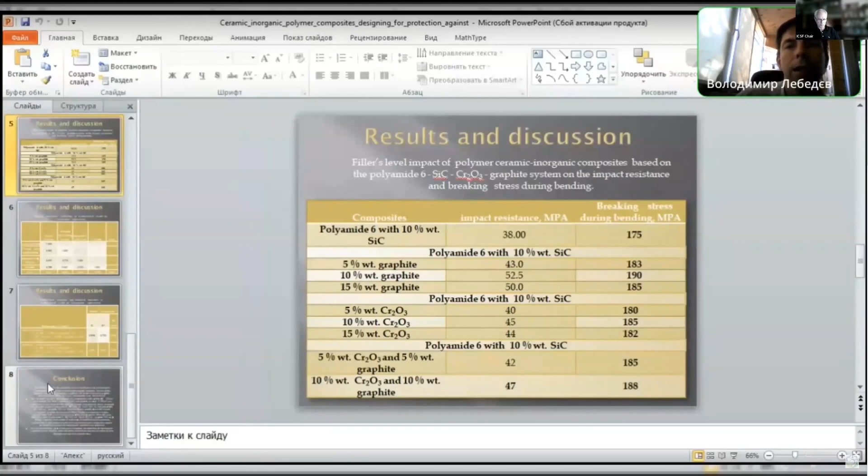From the data in the table, it can be seen that introduction of this ceramic-inorganic filler system into polyamide 6 increases the impact resistance and breaking stress during bending.

The next slide shows that the indicators of impact resistance and breaking stress during bending are interrelated, which is confirmed by the high value of the pairwise correlation coefficient between them.

It is shown that for the system of polyamide and silicon carbide, content increase leads to impact resistance and breaking stress during bending decreasing. At the same time, graphite content increase leads impact resistance and breaking stress during bending to increase.

In the next slide we show the mathematical equation and statistical indicators of the mathematical model for composition optimization.

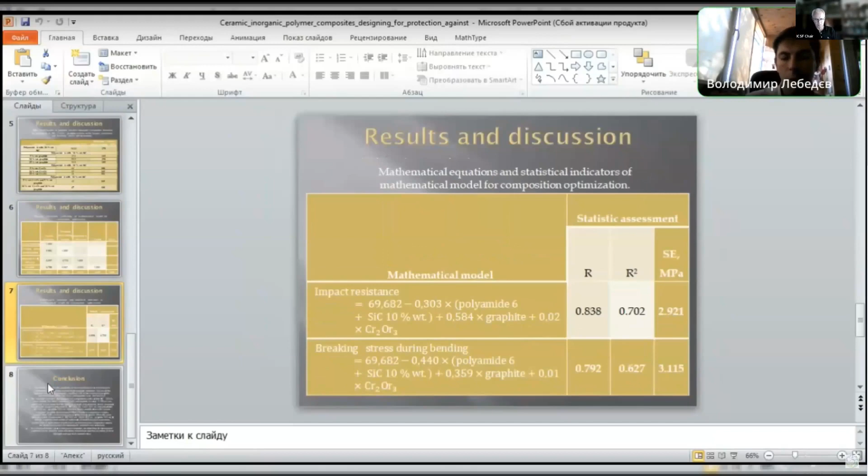Our research allows us to make the following conclusions. The strength complex characteristics of composites with silicon carbide were studied. For them, the content of chromium oxide and graphite in the range of 5 to 15% weight was optimized.

It was found that the optimal strength characteristics are shown by composites based on the system of polyamide, silicon carbide, chromium oxide, and graphite.

For this three-component complex modification with ceramic-inorganic and graphite ferromagnetic fillers, the most optimal system comprises polyamide, 10% silicon carbide, 10% chromium oxide, and 10% graphite.

By design, the experimental statistical mathematical model is in linear regression form. The mathematical optimization of polymeric ceramic-inorganic composite content for protection against electromagnetic radiation was carried out.

The resulting polymeric ceramic-inorganic composites for absorption of electromagnetic radiation can be used for radio-absorbing material production according to their strength and spectral characteristics.

Thank you for the possibility to make this presentation. I am ready for any questions.

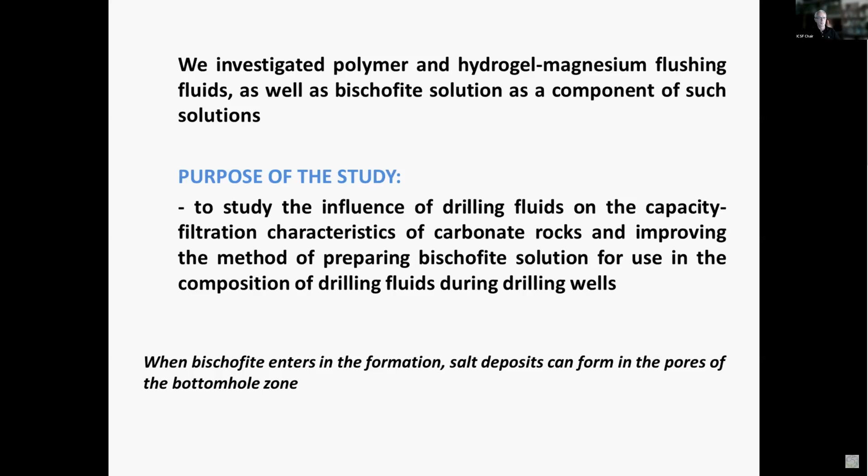The impact of the flushing fluid on the properties of carbonate rocks was assessed using the standard method. The studies were carried out on carbonate core material. The studied types of washing liquids are indicated on the slide.

Solutions of a clay-free polymer magnesium type based on polyacrylamides have the greatest depth of penetration into the formation. At the same time, they are characterized by a low reservoir renewal rate. In addition, after treatment of the core with this solution, the formation of insoluble polymer structures occurs, almost completely clogging the formation. Also, solutions of the polymer potassium type have an insignificant depth of penetration. This effect is achieved by clogging the pores with a solid insoluble clay phase that is part of these solutions. Due to this, the coefficient of formation renewal after the application of such solutions is also low.

Hydrogel magnesium type solutions, with a relatively shallow depth of penetration into the formation, are distinguished among others by a high permeability recovery factor. After the application of such solutions and subsequent acid treatment, the pore space of the formation is almost completely restored. They do not contain the introduced solid phase, which irreversibly clogs the pore space. Carbonate blockers are formed during the preparation of this drilling fluid and do not clog the pore space.

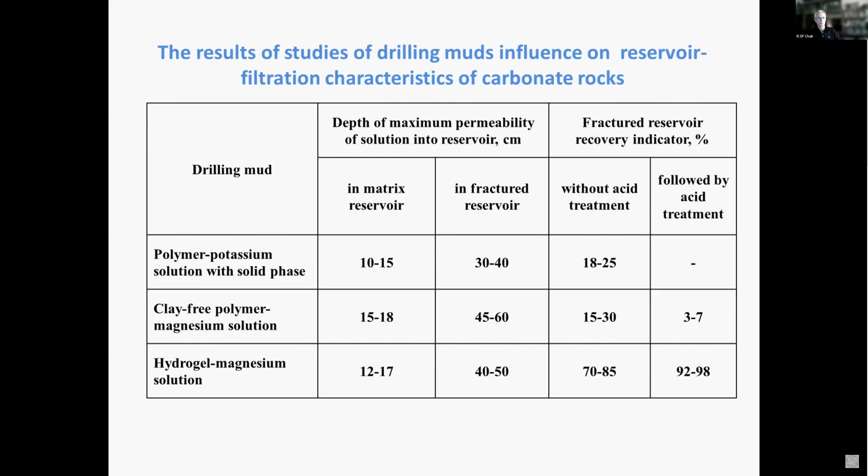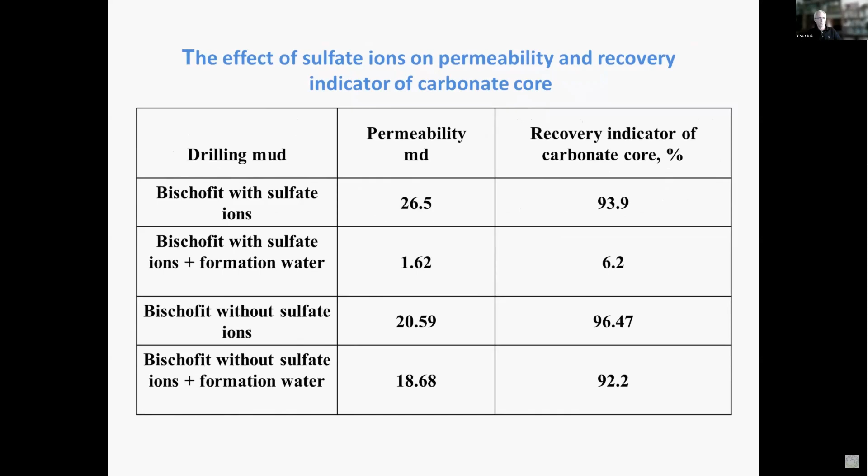For further studies, bischofite solutions were used. Following studies are aimed at removing sulfates from bischofite solutions. For this purpose, the effect of surfactants on the desulfation of bischofite was investigated. The study was carried out in accordance with the standards for determination of sulfate content by gravimetric method.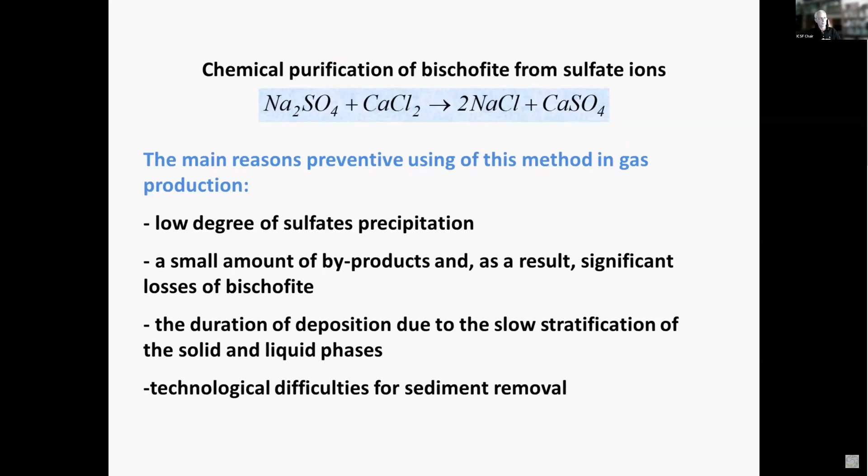Excess introduction of the precipitating calcium chloride leads to a decrease in the degree of calcium sulfate ion precipitation, while the volume of the precipitate does not change. Among the investigated surfactants, EM, CAPB, and SRK are effective catalysts for sulfate precipitation and inhibitors of chloride salting out. It is recommended to use CAPB surfactant as a catalyst for the precipitation of sulfates.

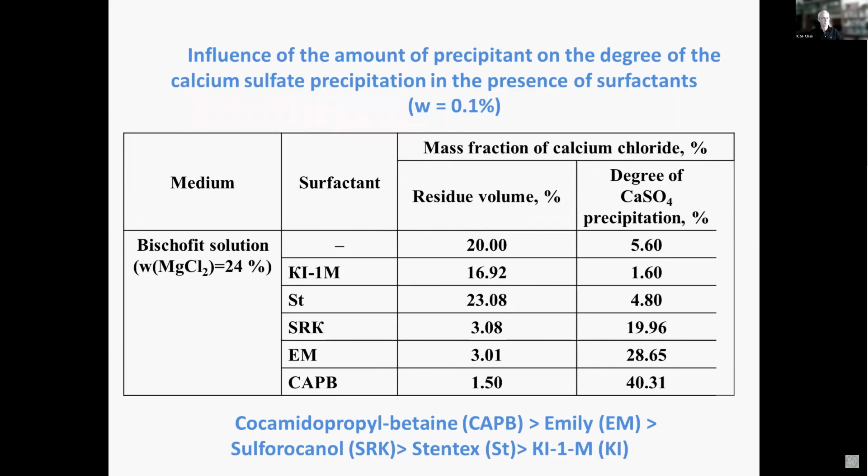On the basis of laboratory studies, an improved method of preparing bischofite solutions for use has been developed, based on mechanical mixing of the components in a specific sequence. Slides are shown.

The results of bischofite solution preparation by the proposed method at the Skhidna-Poltavskaya field of bischofite deposits showed that, in comparison with the traditional method of preparing bischofite solutions, the following happened: Number one, a reduction of the bischofite preparation period by 4 times. Number two, increasing the degree of calcium sulfate removal by 5 to 8 times. Number three, prevention of chloride salting out.

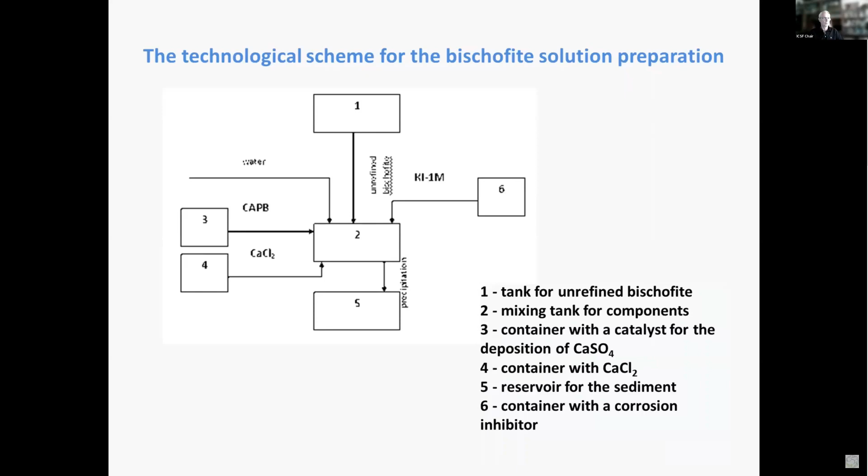Based on the above, the following conclusions can be drawn. Number one, hydrogel magnesium fluid with bischofite without sulfates is the optimal drilling mud for opening of carbonate type reservoirs. Number two, solutions of hydrogel magnesium type with a relatively shallow depth of penetration into the reservoir are distinguished among others by a high permeability recovery indicator. Number three, bischofite solutions without sulfates from the Zaturinska field are recommended to be used as a component of drilling muds of hydrogel magnesium type.

Number four, surfactants which form complex compounds with alkaline earth metal atoms improve calcium sulfate precipitation and prevent the salting out of chlorides during elimination of sulfates from bischofite. Number five, industrial tests show that the preparation of bischofite solution using CAPB reduces the preparation time of bischofite.

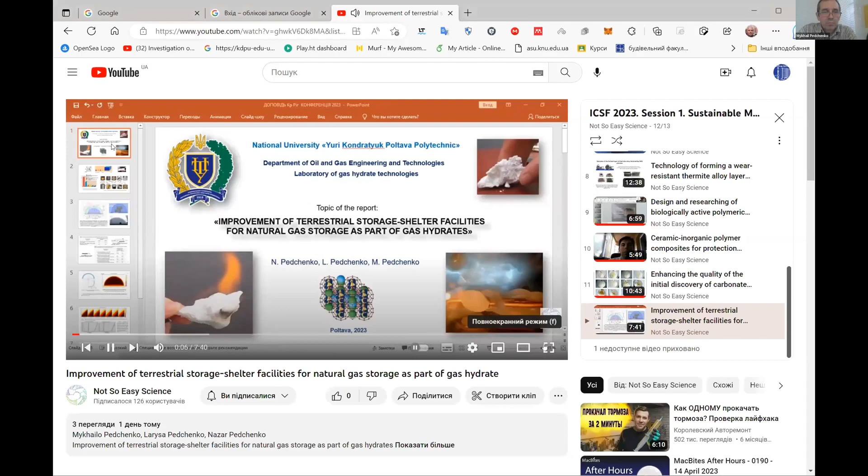The results of the research are brought to your attention. They relate to the improvement of the design and method of operation of ground storage facilities for storing natural gas as a gas hydrate. Today, a number of technologies exist in which gas hydrates are an intermediate or target product. These are gas hydrate technologies. At the same time, natural gas storage in gas hydrate form in many cases becomes a real alternative to

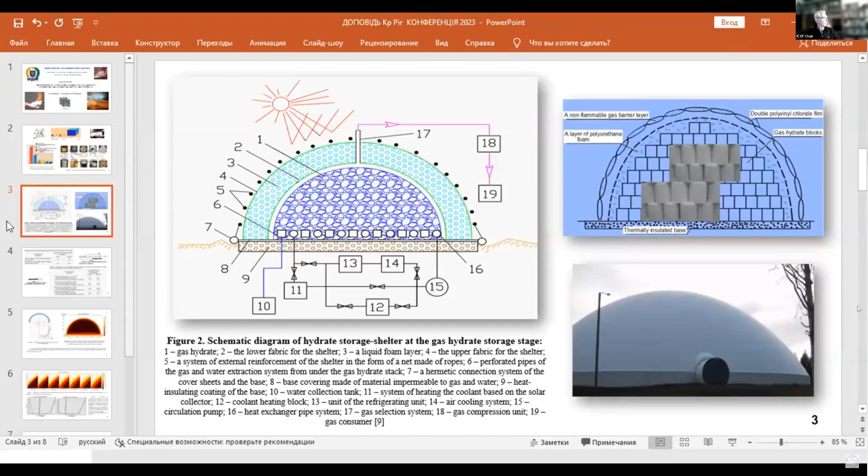The required capacity of the additional cooling system of the storage shelter for storage of gas hydrate without its dissociation at the temperature of 258 Kelvin is 2.1 kilowatts in the winter period and 5.5 kilowatts in the summer period.

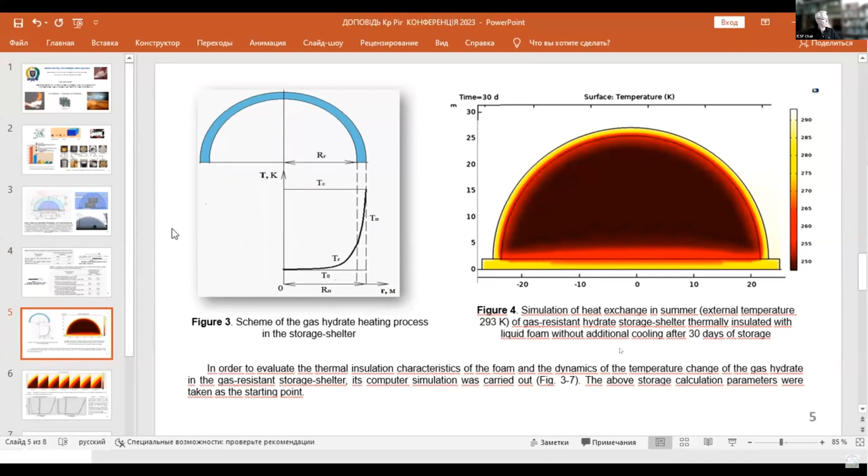In order to evaluate the thermal insulation characteristics of the foam and the dynamics of the temperature change of the gas hydrate in the gas-resistant storage shelter, its numerical and computer simulation was carried out, from 3 to 7, and therefore with an initial temperature of gas hydrate of 248 Kelvin, its additional cooling when stored in the storage shelter insulated with foam, even in the summer months, will be necessary after 30 days of storage. In winter, storage of gas hydrate is possible without additional cooling.

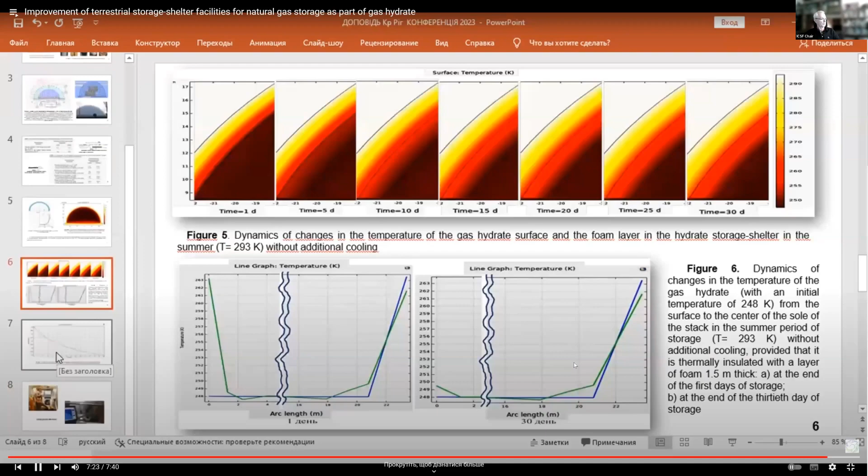So, this improvement consists in the use of liquid stable foam as a thermal insulation material. The use of such gas hydrate storage will significantly increase the efficiency and competitiveness of natural gas storage technology in the form of gas hydrates. And that's all. The report is finished. Thank you for your attention.

Thank you very much. 1 minute. 1 minute. And I have a question.